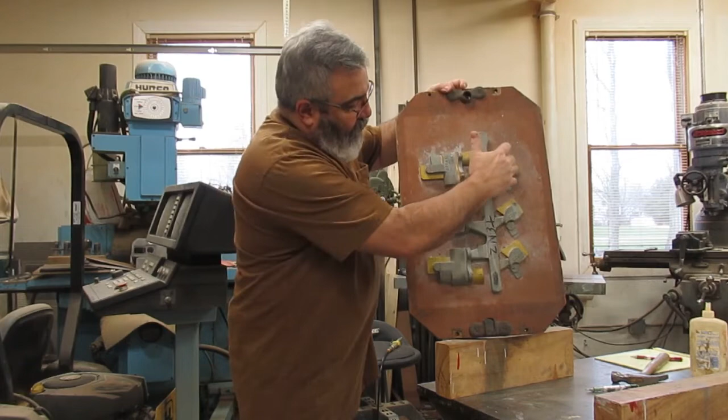I really suggest not putting different patterns on the same match plate, because here's what happens - say you get an order for 100 of each of these. Then say you scrap out 4, 5, or 6 of these patterns. I need to make 4 or 5 more of these, right? So that would be 2 molds I gotta make, and I'm gonna have 2 molds with castings on there also that you're not gonna need. So it's not a good idea to do that.

So what I always suggest is keeping the patterns separate. That way, if you do scrap 1 or 2 of the castings out, you don't have to make a bunch of the other ones. To me, it's common sense usually, and it baffles me to this day how people still do this.

I don't understand. The other thing on this - and like I said, I am a fat head when it comes to pattern making, don't go too much into this - I'm not saying I do everything perfect. I do not, okay? But there's some stuff that's so blatantly wrong with the way people do things, it's not even funny. So anyhow, like I said, I'm just supposed to make core boxes for this.

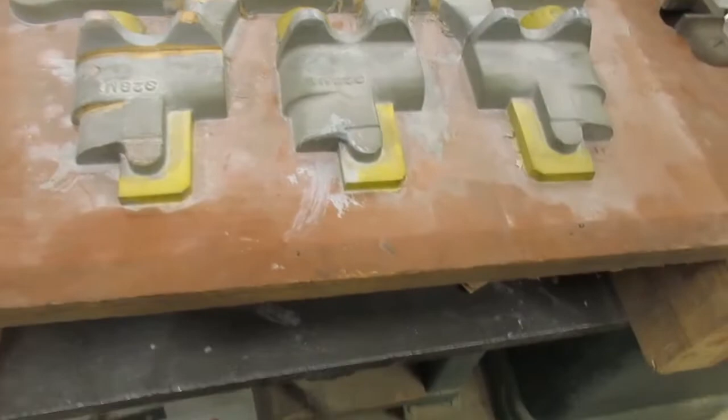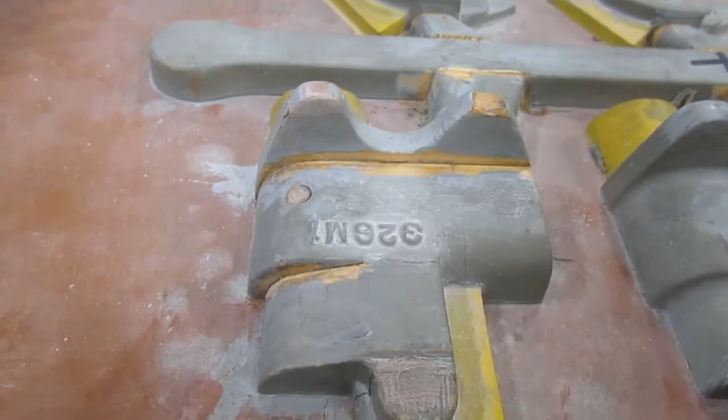All right, so anyhow, I started going over this, and you can see this here - this is all busted right here, so I got to fix this. What I'm going to do here is drill some holes in here and put some Bondo in there, okay? So this pad, for some reason, that's just all...

It's not bad, it's not good either. There's a nice dent here. So what you want to do with these, you want to dig the paint out of there.

Okay, you can drill holes in there, and that way the Bondo will stick in there. I'm going to put Bondo in there.

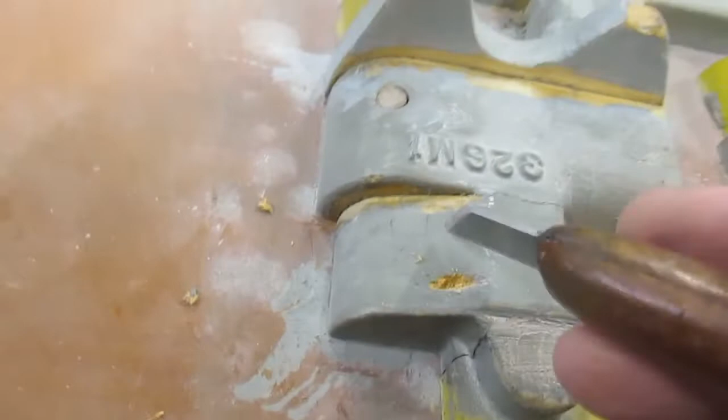So here's what I was talking about. These are hard fillets, plastic. This one was all wax, so I don't understand where... unless, you know what he might have done, he might have used this for his master here. We had this once before. Probably used this for a master. That's why it's pine, that's what he did.

And I bet you these are plastic. These two are plastic, so just pour one more. Look at this little thing, there's not $5-10 worth of plastic in this thing. Right? So then that's what he did.

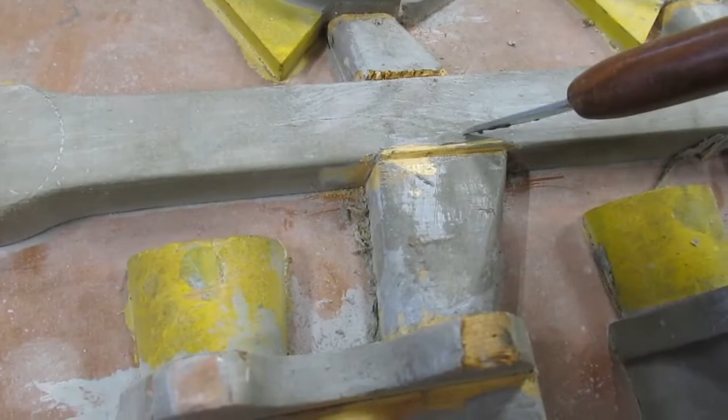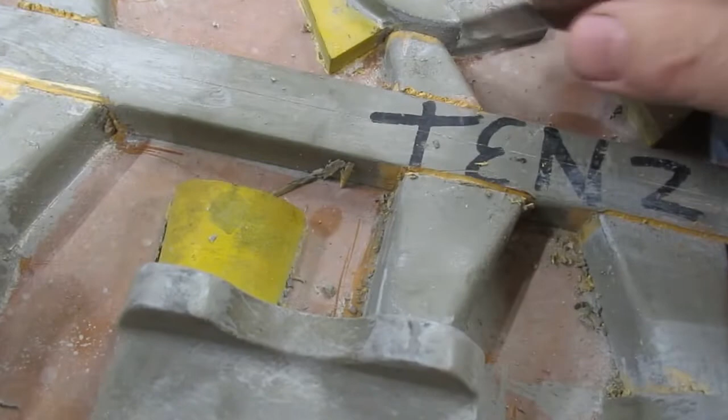So in here, this is all the gating. And he had all wax in here, and it just craps up. Just dig all this wax out. So then probably here, it's probably going to be the same thing. He had wax in this one, so this one's probably his master, and that's what happened there, I bet you.

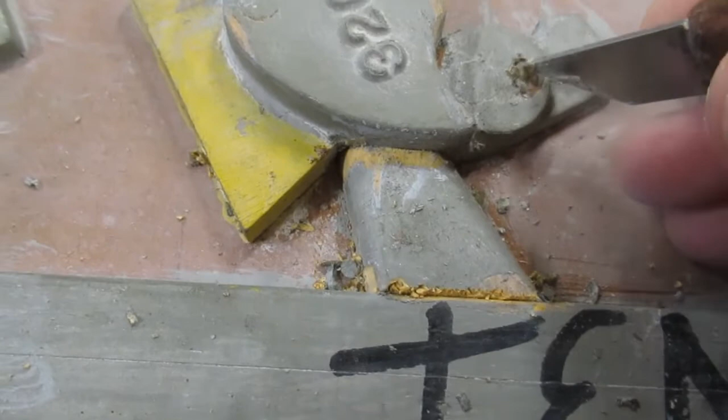So what you got to do, you got to dig all that wax out, because you can see... well, this, maybe not either. Well no, that's a dowel pin. But this one, you can see it's got wax on it, you can get the wax off of there. We'll scrape all that out. Yep, see, look at that wax. Wax in there again, okay.

So we'll scrape all this wax out, and what we're going to do is... this is probably wax here, yep, there's more wax.

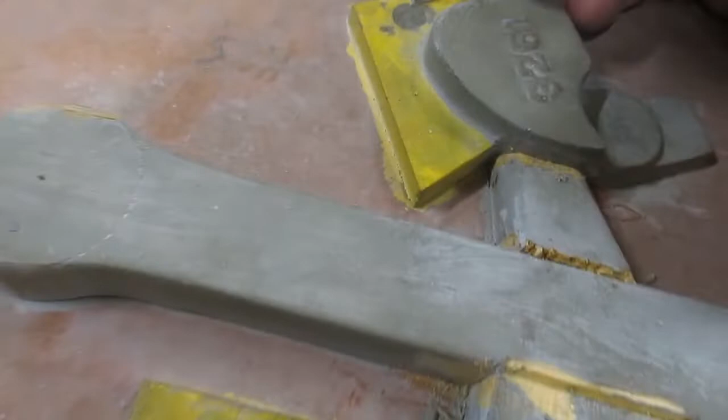Let's see, that's a little plastic right there. So these are, yeah, this is where he screwed them in. So yeah, I bet you that's what he did. That's your master right there. And these are two plastic, and this is your master here. And that's what they did.

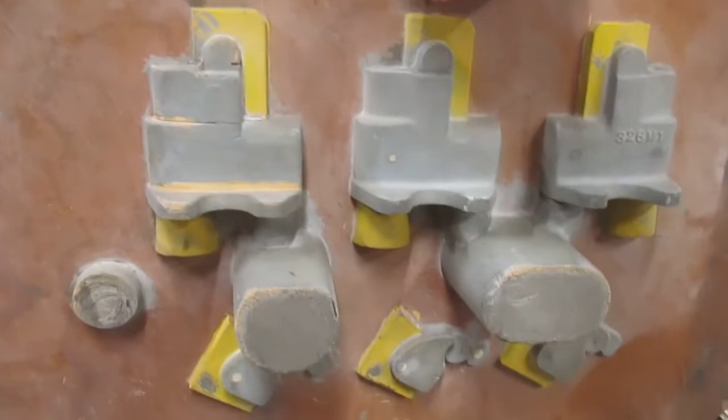So I'll do the same thing. I'm going to go over this side, and we will start putting some Bondo on this.

So here, okay, so what I'm going to do is I'm going to finish scraping all the wax off of this. I'm going to put Bondo in this, and then I'm going to let it sit for quite a while, let that Bondo harden. You've used Bondo, I'm sure you guys have, for other projects, but the longer you let it sit, the better. You could probably put some Bondo on here, 5 minutes later start sanding it off, but I like to let it, especially stuff like this, harden for a few hours.

And then in between, what I'll do is I'll start working on, I'm going to give them urethane core boxes. Well, maybe 2 of them we might make out of wood, I'm not 100% sure. So we'll either go ahead and make some sticks, I'll show you how we're making some sticks, or we might go ahead and just do a couple wooden core boxes real quick.

And like I said, this is going to the same foundry. The guy does stuff for me there, he'll do some small castings here and there. He does iron, so he'll do small iron stuff for me. So what I'll do is, instead of just like... there's a couple just flat, kind of squarish, rectangular-ish looking

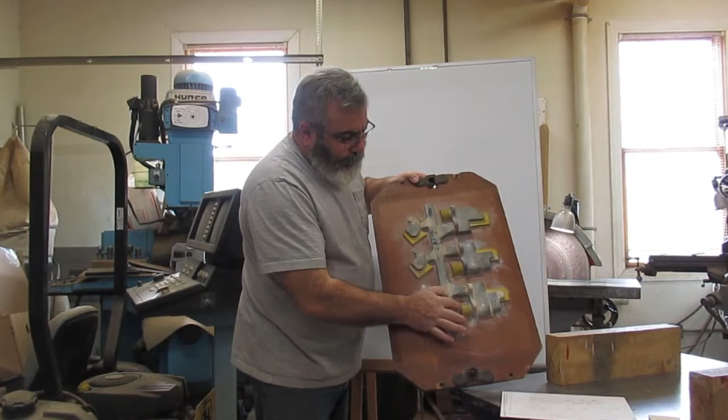So this piece right here, you see this core print right here, we're going to work on that one. And like I said, traditionally what I would do is just go over, put it in the lathe and go, but I'm trying to keep remembering everybody doesn't have a lathe, so I'll show you an alternative way to do it. Let's do a little chalk talk here.

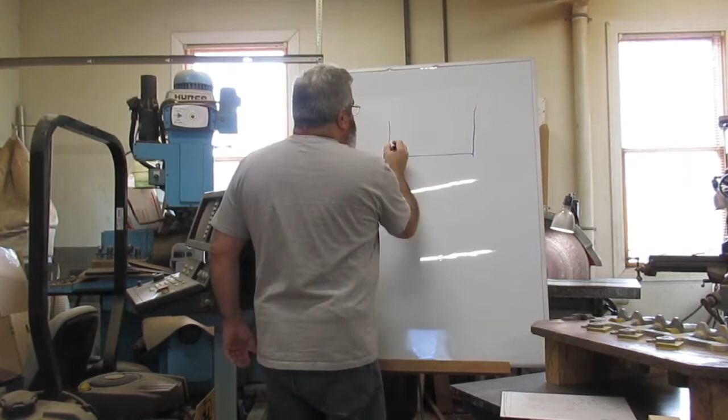We haven't had the chalk talks, we got to get a chalk talk out one of these days. So anyhow, we're just going to do a looking-down view. There's that, and then there's those little hubs here.

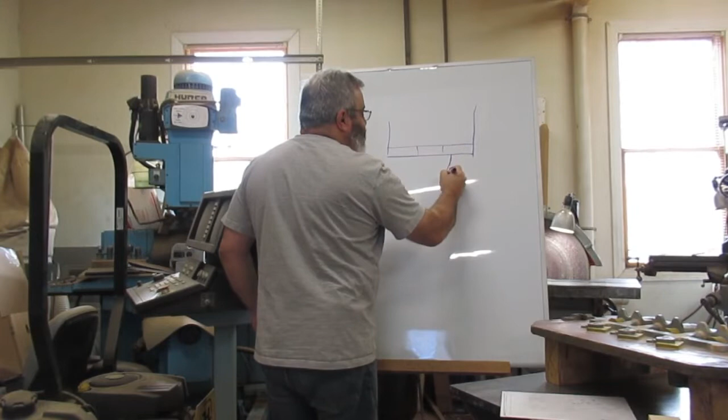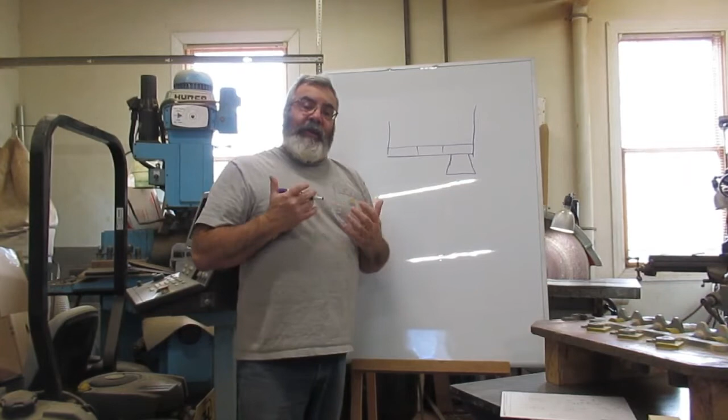It's all the way at the one end, and if you can see, he's got a core print that comes out that's on an angle. I'm going to exaggerate this a little bit. The reason he's got this core print on an angle is that's what's called a key - he's going to key this core in there. So let's go over here. If I were to make this straight, then what it is, this core looks like this.

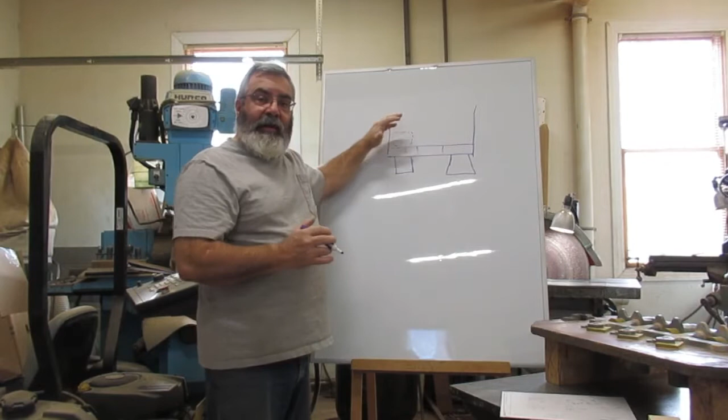Okay, so if I were just to make this straight, this is all going to be open in the mold. It's going to be a big hole. Then we're going to have a chunk of sand sitting in there to make a hole. Keep on thinking back, forth, back, forth. So we're going to have this chunk of sand in there.

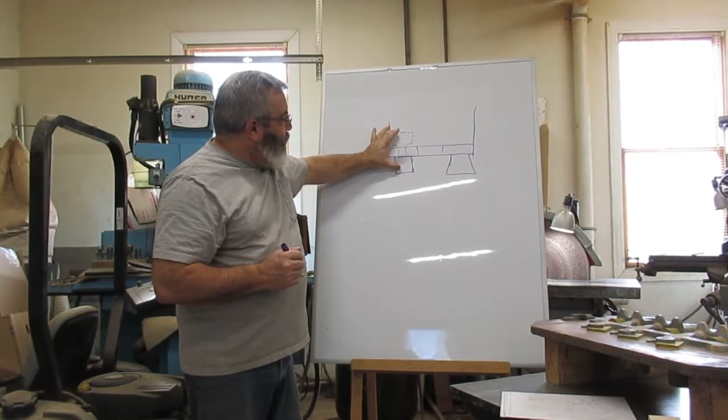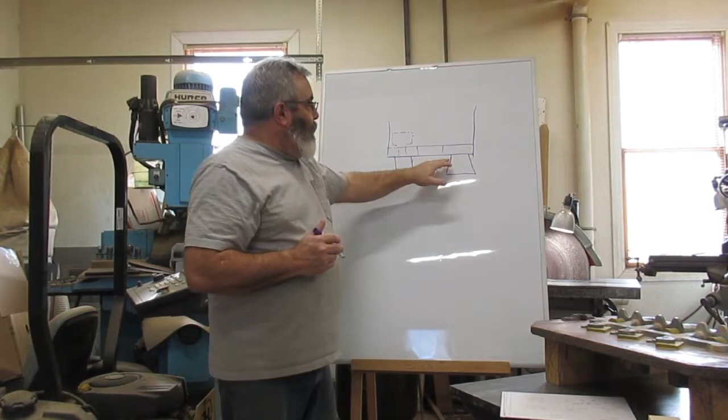He's got to make sure, if I were just to make these sides straight, if he sets this core in here and doesn't get it all the way to the back side here, this core is going to be protruding into the casting more than it needs to be. So by putting this key on here, this angle, this is going to stop this core from going into the casting. So that's why he's got an angle.

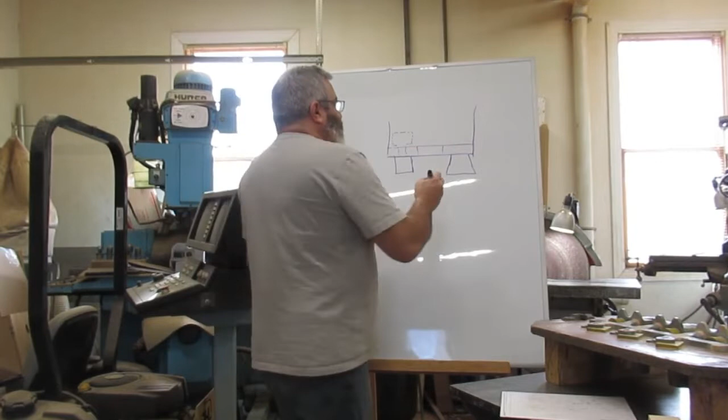And then this is going to look, like I said, kind of a bulbous shaped core. Alright, so what I did here, like I said, what I normally do is I'll do this on the lathe, but I'm going to show you guys an alternative way to do it.

So what we're going to do is I got my pieces of stock out and I just put a little dab of glue and we spot glued these together, okay, because we're going to need the cope half, drag half. So what I did, I measured the core print, and I'm going to reiterate this again. So this is an aluminum casting, so you know, aluminum is 3/16 to a foot shrink rule, okay?

But here's the thing, this core print is where it's at already. So I could measure it with a standard scale ruler, and use that measurement, or I could just go ahead and use my shrink rule, either or. So you can use a standard ruler also, but here's where it gets confusing, okay?

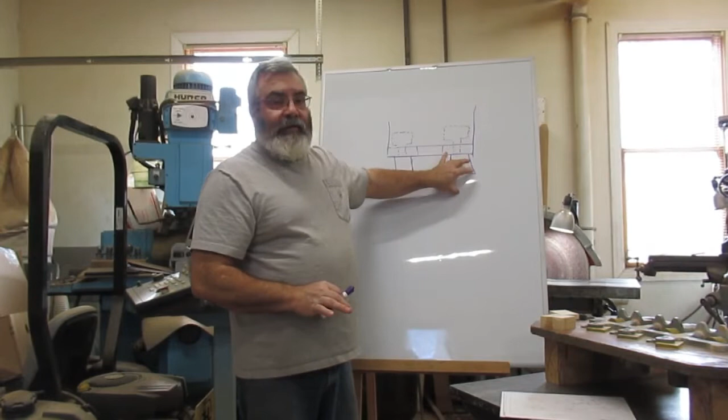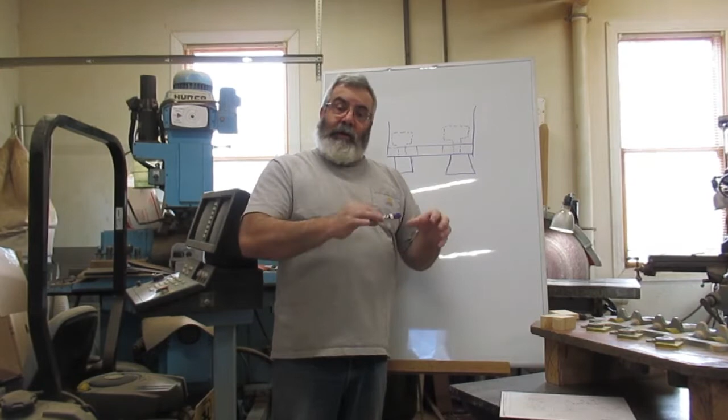And this is where, like I said, this trade is just all over the place, okay? So this is already made, period. So you want to get the exact dimension from here, and actually you want to make it just a touch smaller, okay? Like this, I think it's an inch and a half, a hair under a 32nd smaller, because you want it to be able to fit into the hole and make sure we get a little clearance here. This is made on the pattern.

We measured the core print for what it is. However, the inside, guess what? We got to do shrink. I can't measure what's there, there's nothing to the inside of this, okay? So that's got to be done with a 3/16 shrink.

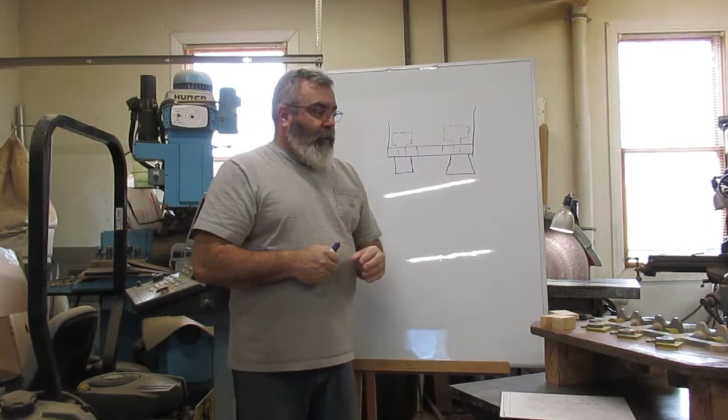So normally what I do, I just get my shrink ruler out, I'll measure the core print, just do it that way. That way you don't get confused. Like I said, what I always try to do is, if I'm working off a casting, I gotta have my standard ruler out, I'll measure the casting, and then go back to the shrink ruler. Once I'm done measuring and laying out, I put the standard ruler away and just have my shrink ruler out. That way you're not picking up the other one, okay?

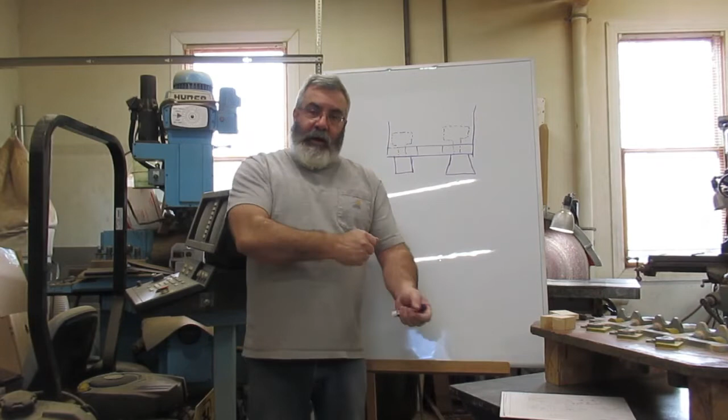So what I'm gonna do is, what I did was, I think this was like 1.25 inches here. So I got two pieces, 1.25 inches high. Alright, and I got my diameter on here. I'm gonna minus the draft on there. And then this next piece here, I think this is 1.25 inches here. This one's a 1/2 inch here, and I think this one's like 3/4 or something like that, somewhere around there. So I got all the pieces out, okay? I just got two pieces a 1/2 inch, spot glued them together.

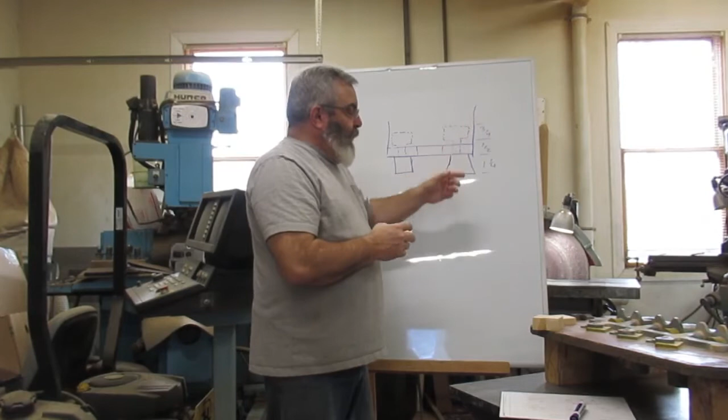This is a radius, so I'm just gonna strike a circle on here like this, alright? And then circle around. I'm gonna put my center lines all the way around on this again, so that when I stack them up, I can get them on center, okay? So I do that.

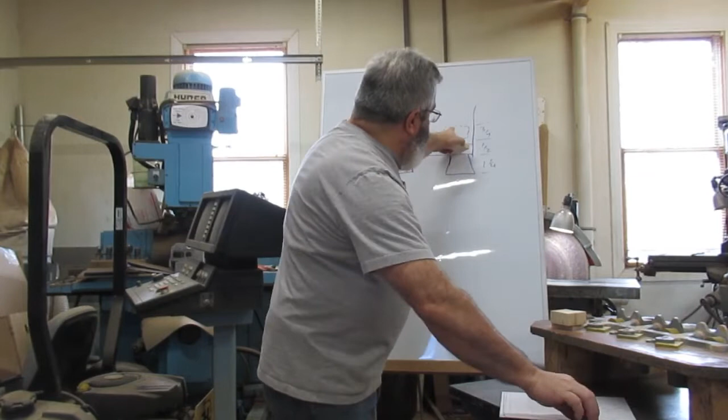Now, a little bit tricky on the end of this one. This is all spherical, okay? So I got my draft on all the sides. So I need to put draft on both ends, all right?

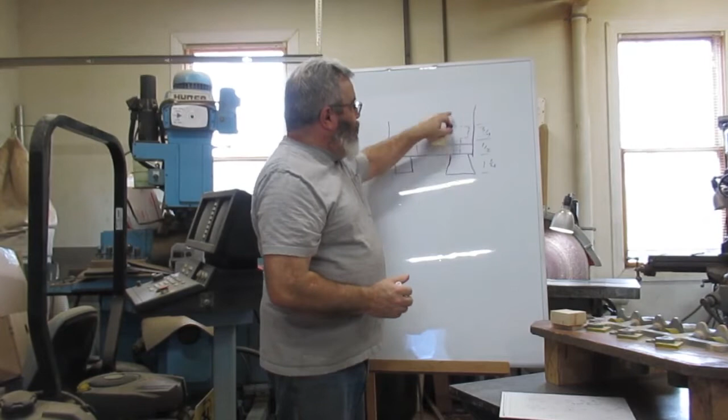So this particular piece, what we'll do is we're gonna cut it out. I'm gonna add the draft on this. This one is gonna be a little more difficult to do. So I already put my draft on here. Then we'll get my centers and spin the radius on here, okay?

So that's all I'm gonna do. I'm gonna put the radius on here, sand these out, glue them together, and that's gonna be your core stick, and then we'll pour plastic off of this, okay?

Now, like I said, normally this isn't a good way to do this if it was going to be a pattern and it was going to be the final piece of equipment. But like I said, it's a core stick. We're going to use it once to make a mold, and that's it. So it's not a big issue, you know, the strength doesn't have to be an issue with your building construction on it. Okay, so I'm going to do those.

And then the other pieces I did here too was I went ahead and made these two core sticks. This is two different ones, all right? Like I said, this one just has a radius in here. This one just comes in straight, and it's just gonna produce a little slot hole under there.

All right, so I think this was, I can't remember the dimensions exactly. I think this one's a 5/8 hole in there, so it's got to be 5/16 thick. So I've got a couple pieces of 5/16 inch stock out, and this one I think is 32nd under that, so it's a little thinner. All right, so I got 2 pieces of each out.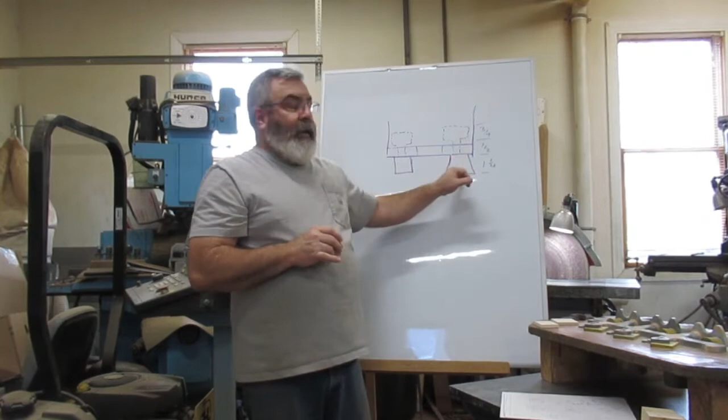We're going to mount them on a piece of plywood, paint them up, make sure they're nice and painted up there. Then we'll make some frames to surround them, and then we're going to pour some core boxes. All right, so let me get to that point. You guys have seen me sanding things out and that. We'll get to the point where I'm going to do the core boxes, pour them. I'll show you how I make the frames for them and how I'm going to pour them, and then we'll get back with you. Okay, hang tight, guys.

Hey again, guys. Hopefully it's the wrap up of these core boxes here. Finally got all the sticks done. Started making the frames for them. I made them out of mahogany because, like I said, this one's got to be a little bit more rugged than that.

Okay, so like I said too, with these, they're just basically little scrap pieces. You know, it wasn't, you didn't have to get a big board out and cut them up, all right? So that's why I say I always keep a little bit of the scrap. Yeah, you get to the point where it gets overwhelming, okay? So I made these frames. Here's what I'm going to do. They're going to be what's called open-end dump boxes, and I'll show you when we're done. Explain them a little bit more. So the open end's going to be down here.

So I got a piece of wood here, all greased up, and these are going to set in here like that. We're going to pour this side. I've got these 2 also here. We're going to pour these, let them set for an hour or so, and then I just spot glued the sticks onto that piece of plywood a bit, but I'll knock that piece of plywood off. We'll get the other half, spot glue them on, grease everything up, and pour the other halves.